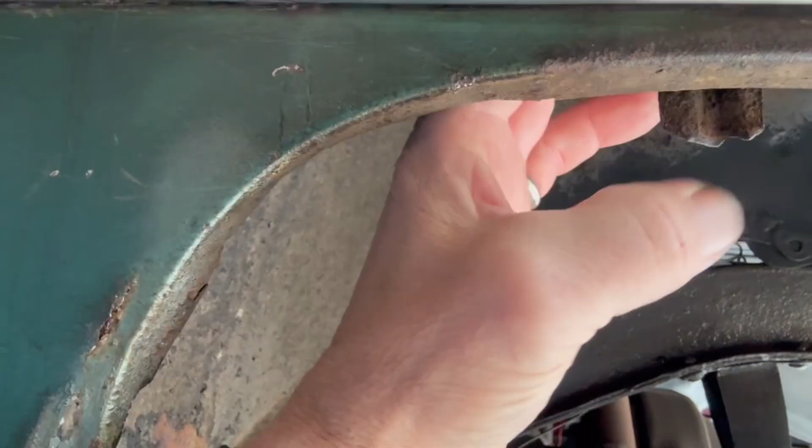Today we're working on fender skirt tabs, not the tabs on the skirt itself, but on models that came from the factory with fender skirts. These tabs are welded to the inner fender to help position the skirt and keep it from moving in towards the wheel. They're mostly present on the driver's side of the vehicle, but completely absent from the passenger side of the vehicle I'm rebuilding. So in this video, I'm going to measure and fabricate new tabs and install them. Stick around.

So here I am under the car trying to make up these tabs that keep the fender skirt from moving inward towards the wheel. Here's the perspective.

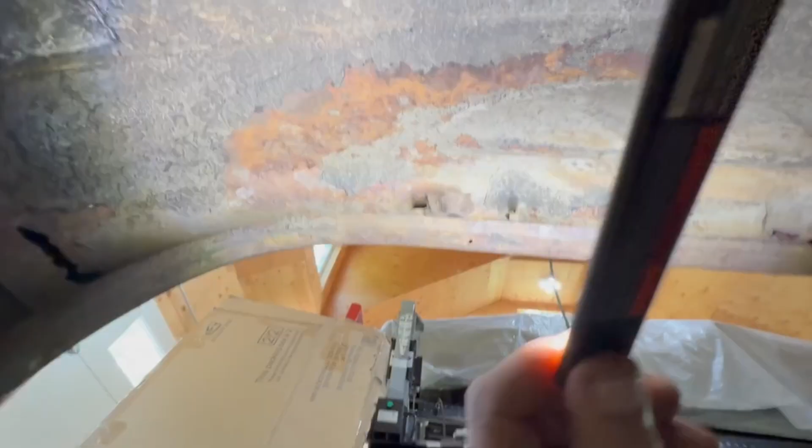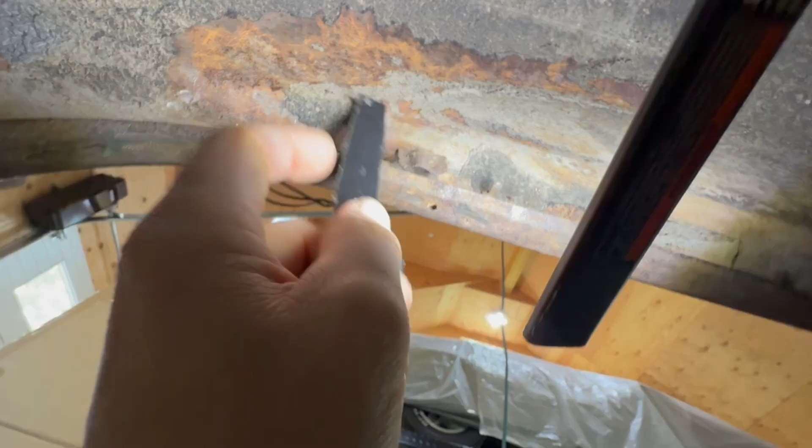I've taken some measurements, drawn some diagrams, and figured out these are 16 gauge. What I'm going to do is take this piece of metal and bend it to the rough shape, the up, over, and back down shape, so I can begin to try and form these out of some stock. Let me get on that.

This is the bottom part of the fender lip, and this is the innermost part with the angle that the skirt touches. So the skirt touches here and here. These clamps, once I make them, weld in like that. Maybe clamps isn't the right word, but tabs. In any case, I'll use this part of the template later, but right now I need to get the J shape properly.

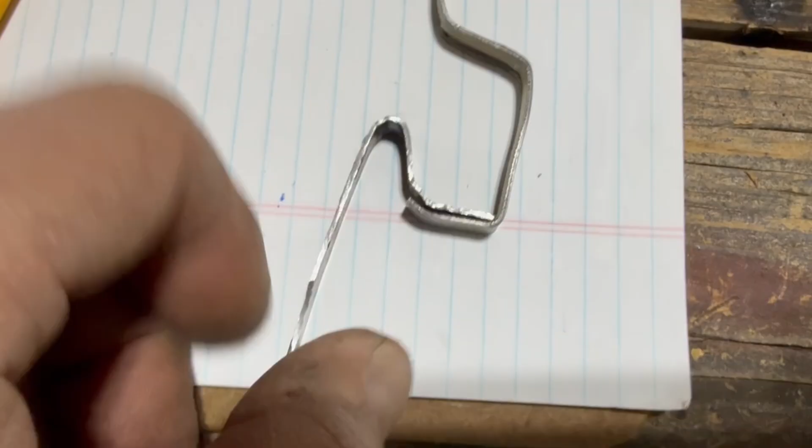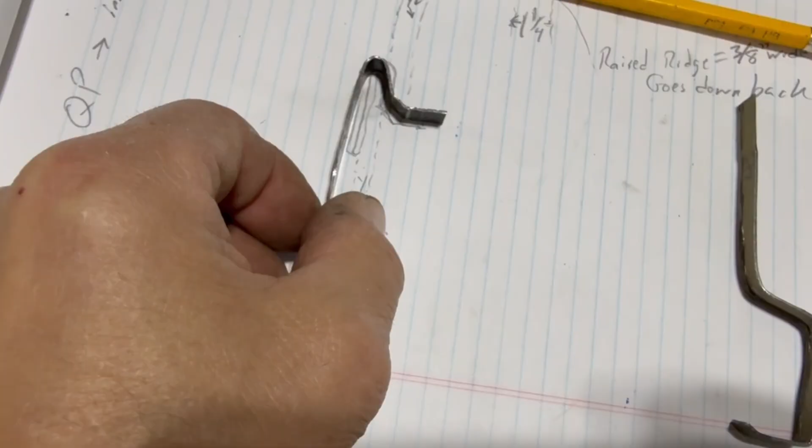So here's what I have so far. I've got this lower bend from this template, and under the car, I've got the approximate shape of the tab. Obviously this isn't to scale, but this is kind of what I'm after, and this piece is longer than it needs to be. Let me show you under the car how this shapes up, and then we'll see what we can do about forming this.

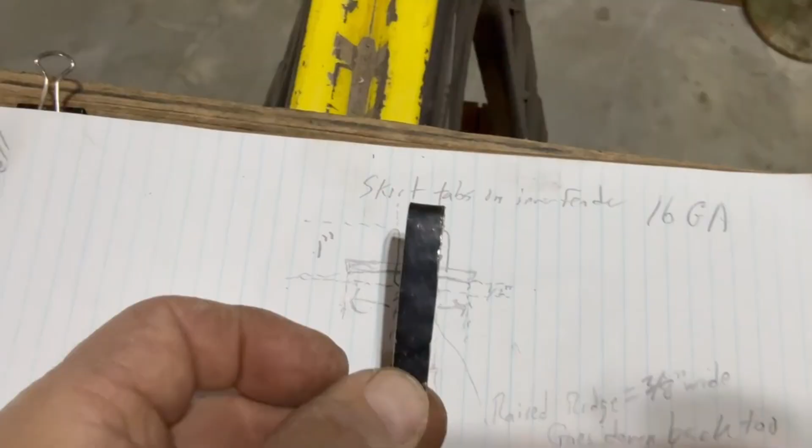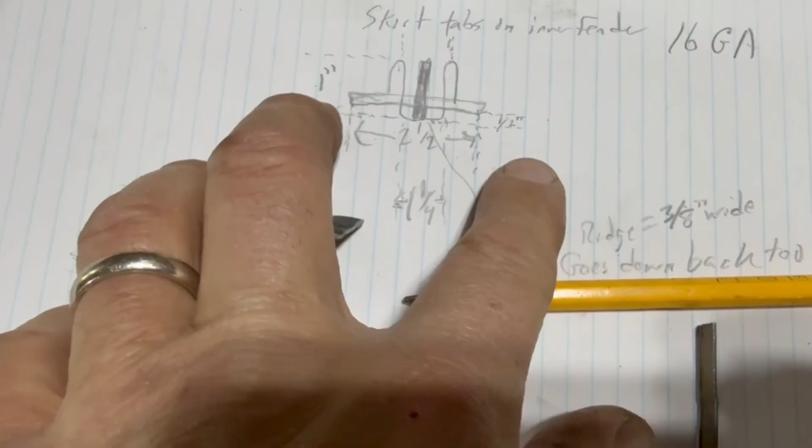According to this diagram, the tab is wider — a good 1.25 inches wide, while this is maybe 3/8 wide. And then there's a base which is 2.5 inches wide, which I haven't begun to worry about just yet. So let me show you under the car and we'll figure the next steps.

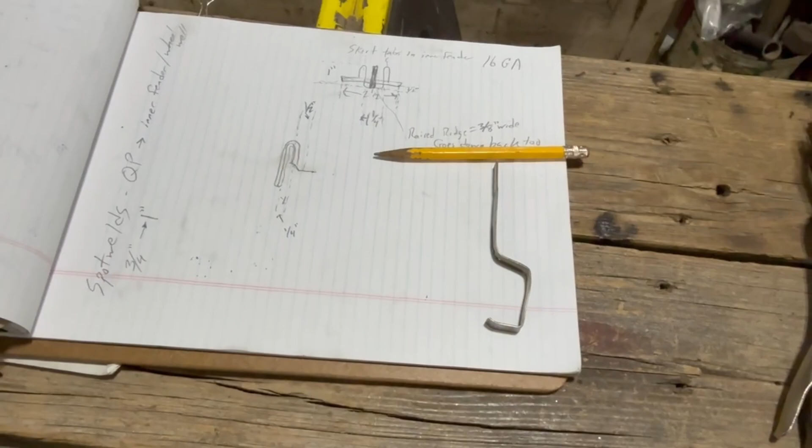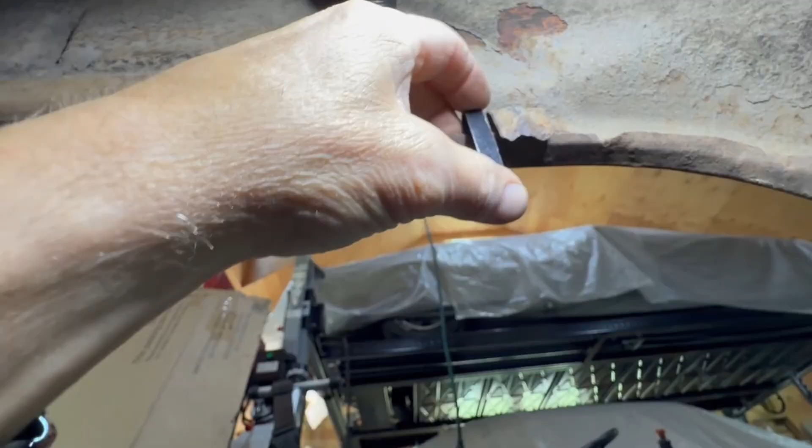So here we are under the car. Let's fit up this piece. The base to the original piece is there, and it's 16 gauge. I've set this so it's a little taller than that. In fact, if I pull it over, I can feel that this would almost ride on top of that. Looks like we've got the angle pretty close, we just don't have the length.

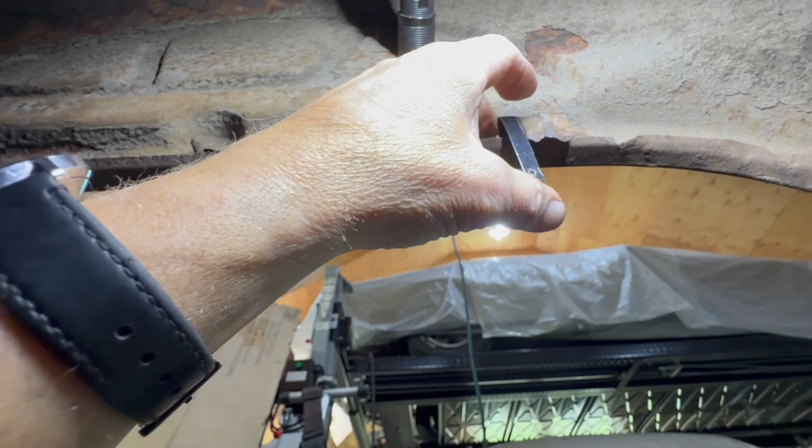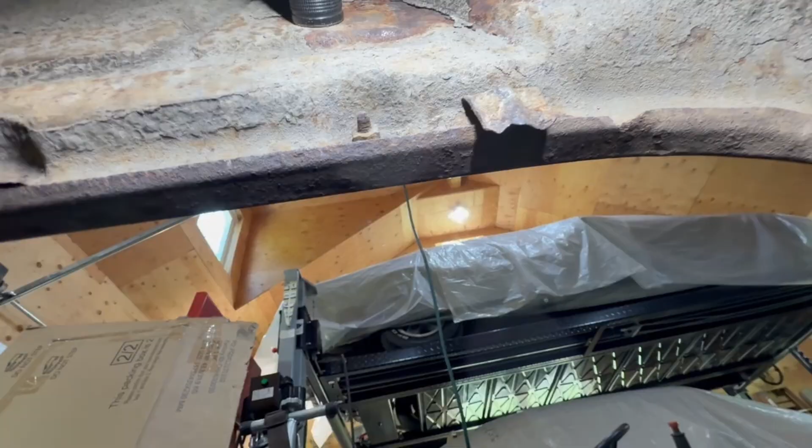So let me see what I can do about roughing that out in 16 gauge. I know 16 gauge is going to be tough to bend, but now that I have a pretty good template, maybe I can use the brake and that should help us out. Not quite sure what to do about the base — do I weld tabs, just make this tab and weld extensions on for the base, or do I bend the whole thing up and then cut it to get this center section? So I'm just not sure yet.

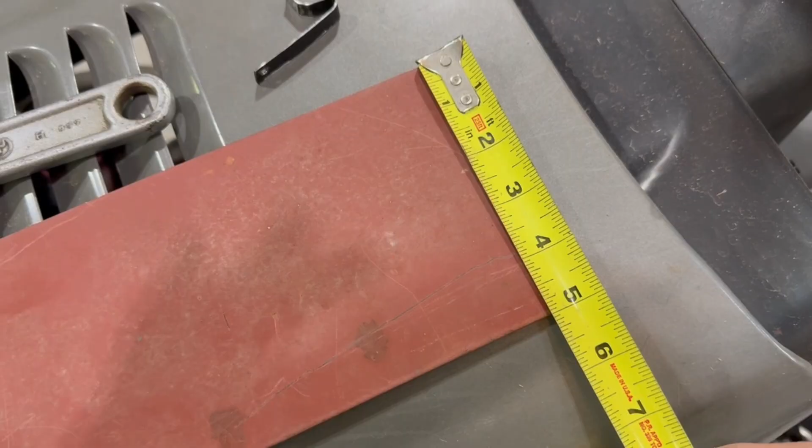According to the diagram, these things have a 2.5 inch base, and I need to make two of them. This piece of 16 gauge I have is 5 inches wide. So I'm going to try and do the lower bends on both of them and then cut this in half if I'm successful with the lower bends.

I've marked where I want the bends, so like that and like that. Frankly, I'm not sure if my brake can even handle 16 gauge, so this is a real crapshoot. I'm going to do this outer bend first.

So first thing I'll do is — yeah, actually it's bending it this way. I'll put that bend in, then pull it back and put the second bend in. Then of course this loop I'll have to figure out, but I'll be working with a much smaller piece at that point. In fact, maybe I'll gouge out the rough tab at that point.

So I guess this is proof of concept. I have enough metal that if I screw this up, I can try it over with a different method. Let's see how we make out.

Well, my brake is strong enough to bend 16 gauge, but not accurate enough to put that — I don't know what the correct term would be, maybe a compound bend. So I think this might be close enough though. Let me figure out how to hold this so I can show you what I mean. While I didn't get this fine double bend in there, I think that overall shape is compatible with the inside of the wheel well. Same on the other side also. So the piece I'm trying to make, which is this — oops.

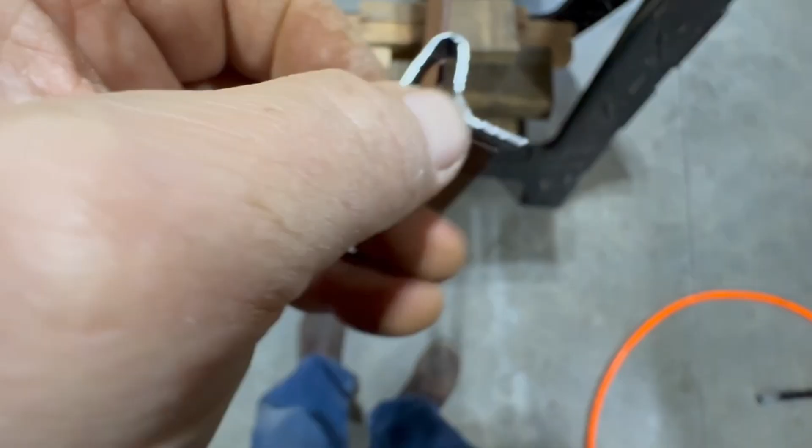So this part would mount into the wheel well, then go up and back down towards the fender skirt, towards the ground. Same basic shape, as long as it fits in the wheel well. I could trim this edge down a little bit so it sets nicely against that inner edge, the innermost lip of the wheel well, right here. Then the tab goes up and back down, roughly that shape.

So we might be able to pull that off. Let me see what I can do. Guess I need to figure out how much length I need, then cut this in half and try to whittle out the individual tabs. Still a prototype, proof of concept, but so far so good, I suppose.

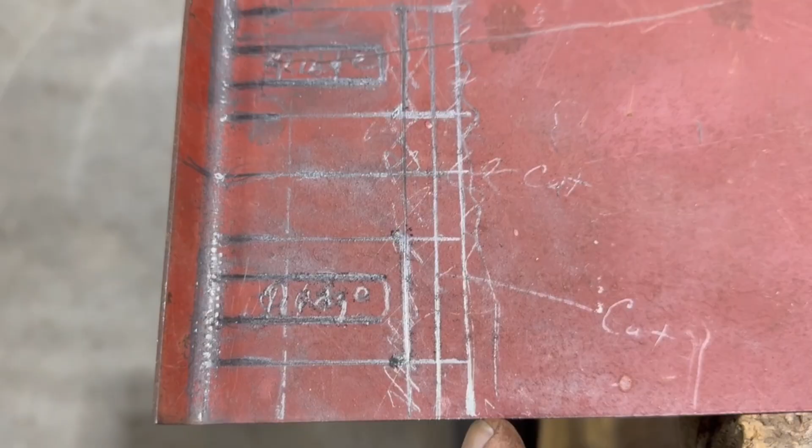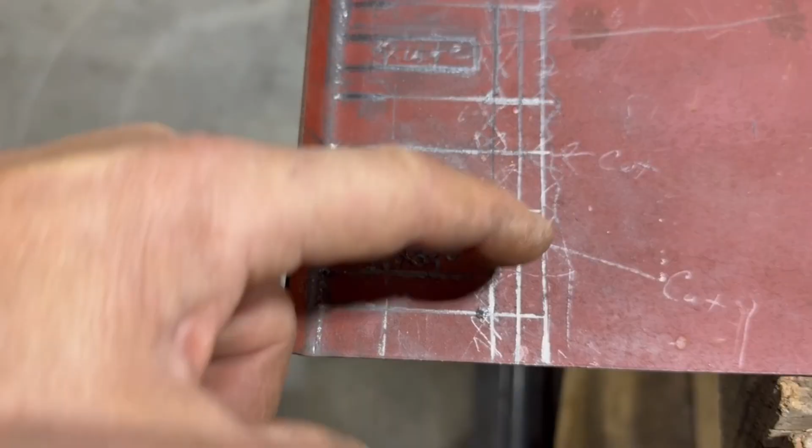Using the dimensions I captured earlier, here are the two tabs mocked up. I'm going to cut the piece off about here, where I think the actual length of the tab is closer to here. You can see where the bend would be, and then I have a ridge there, so I'll have to hammer that from the outside. The base of each tab will be this big, and you can see the basic shape of the tab, where I have to hammer the ridge, and where I need to bend it to put the J-bend in.

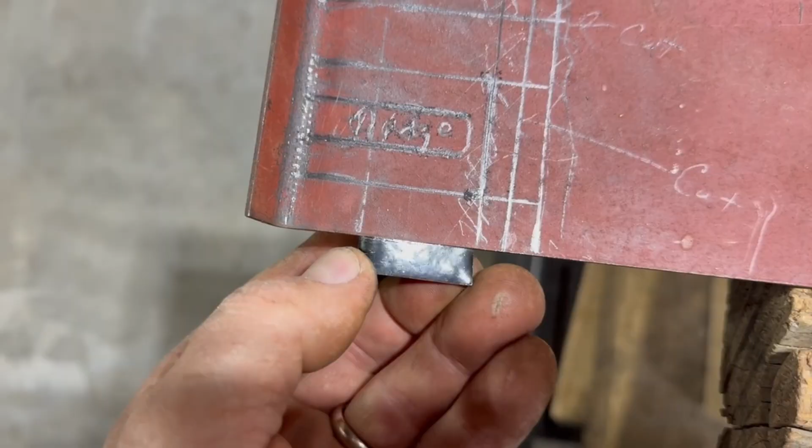Working against the template, this is about how it looks. There's the J-bend, this comes up here, and you can see that's roughly the edge of the tab. The ridge is going to be proud on this side. So anyway, that's the plan.

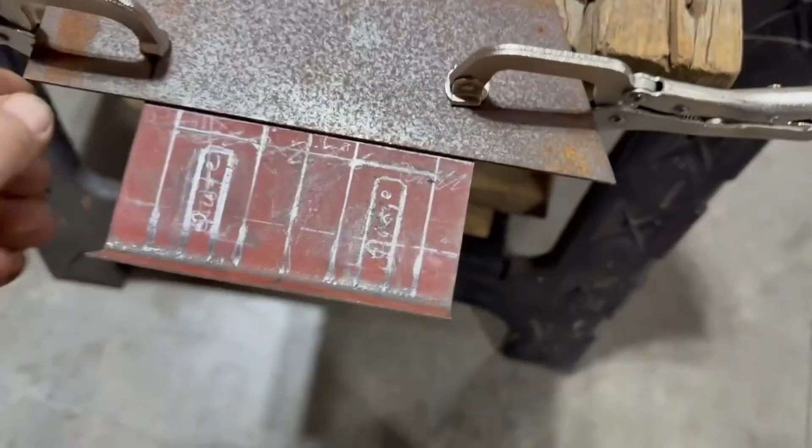Better start cutting and shaping. I've clamped a piece of heavy stock here to help guide the cutting wheel. I think this is probably about 10 gauge, feels thicker than 14, maybe it's 12 gauge. Anyway, that should help guide the cutting wheel, give me a cleaner, squarer cut there.

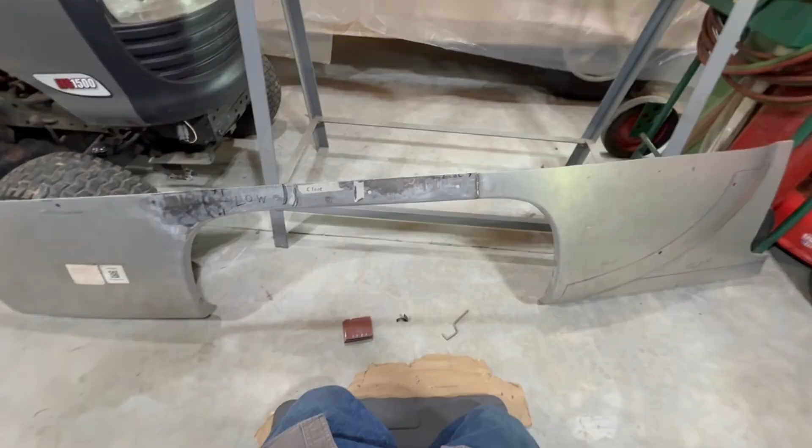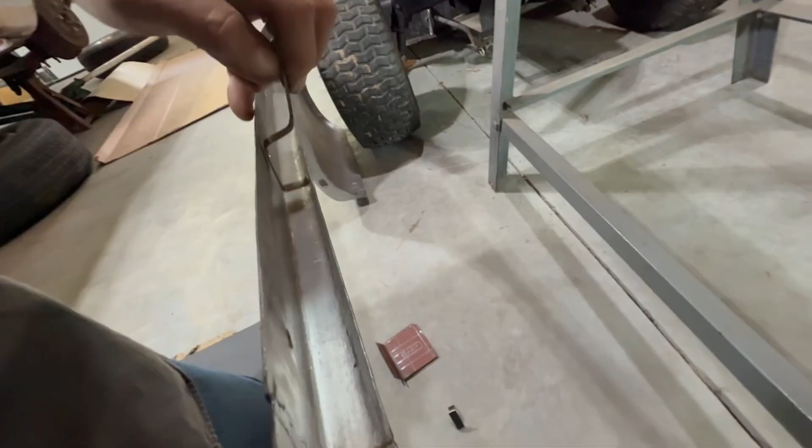So we're over here at the quarter panel to do a sanity check. Here is this piece, just showing the shape of the fender lip and the edge of the wheel well. And this is our mocked up tab, and our tabs fit in like this, and then hang down to support the fender skirt. So the mock-up is about right.

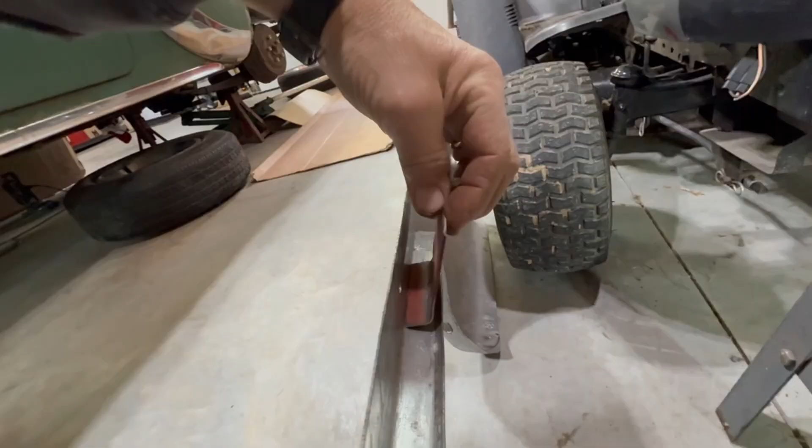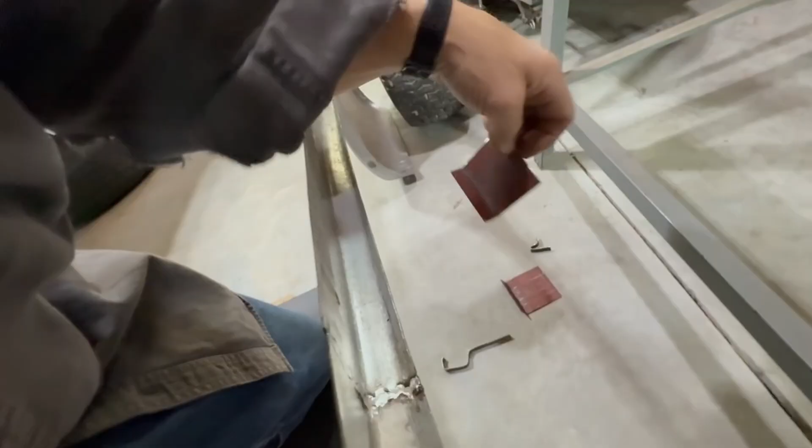Now here are our two respective tab blanks. You can see that one fits there okay, and this one fits up at this end okay. Let's check the other one. The other one fits here okay, and fits up this way okay. So far so good. We've got some more trimming and shaping to do, but I'd have to say we're on the right track.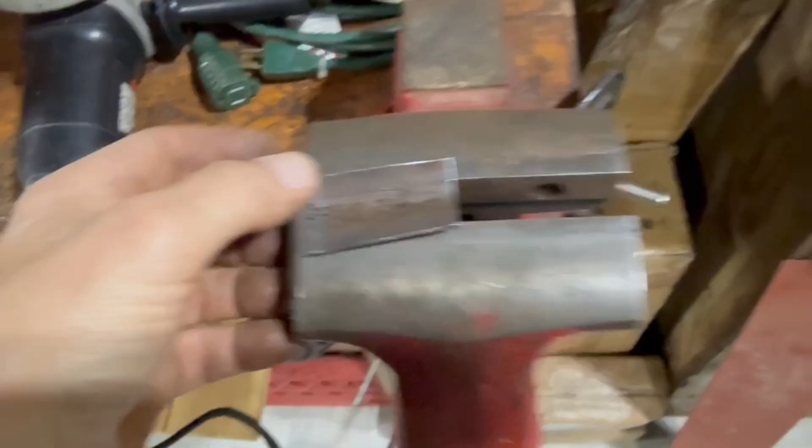So I have everything trimmed, ground, and filed, and I started to beat the divot in, the bevel, the ridge, in the open jaws of a vise. You can see it's mostly there. What I need to do though is put a little bit of a 90 or 45 right about here, to make it more of a defined ridge instead of a gentle curve. Anyway, we're getting close. Obviously the tab's a little longer than it needs to be, but I'm pretty happy with how that's turning out.

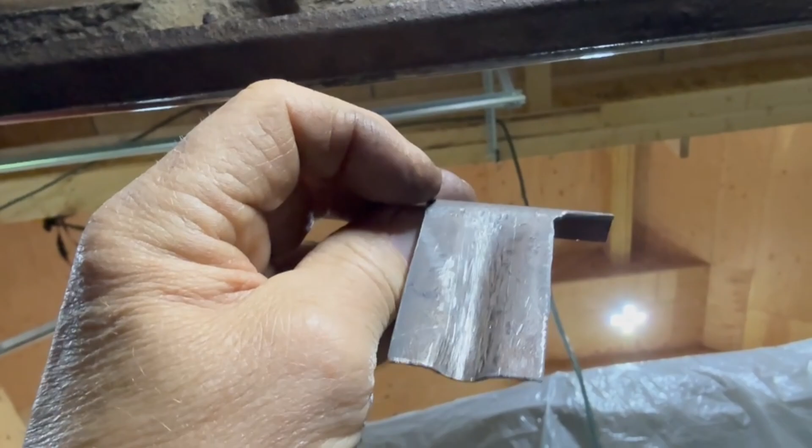I've straightened the edges of the ridge out a bit, which of course brought the ridge down a bit. I compared it to what's on the car, and the ridge needs to be a little deeper, so I'll narrow the jaws of the vise a little and try to poke that in deeper. That ridge is looking a lot better, pretty clean. Let's see, looks pretty close to the original.

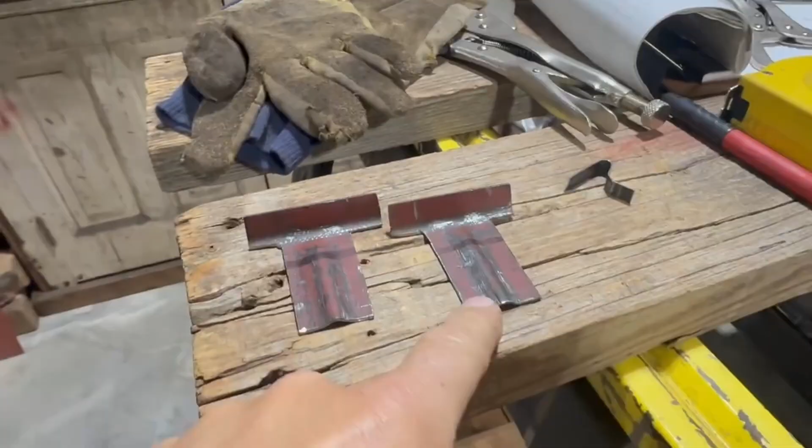So I formed the second one of these, this one here. Ironically, it was more work and didn't turn out as well as the first one. You can see more hammer marks on it and everything, but you can see that the two are compatible. They fit together reasonably tightly regardless of the angle, so I'd say they're equivalent.

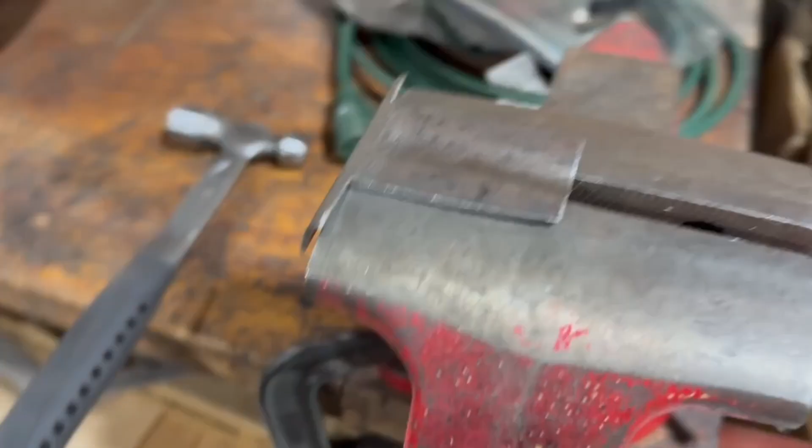So the next step is to decide where and how to make the J-bend. We'll figure that out shortly. As far as putting the ridges in here, I opened the jaws of a vise, set the flat piece in there, and beat on it repeatedly with this pointed body hammer.

And up in this corner here, I did hit it a little bit with the ball peen, and as you saw, the flanges weren't perfectly flat. So once I had the ridge, I put the piece in like that and hit in this direction to bring the flange edges a little flatter. And in cases where it was a little too proud, I put the piece in like that just to flatten the ridge out a little bit. Then I dropped it on the floor, and that completed the process.

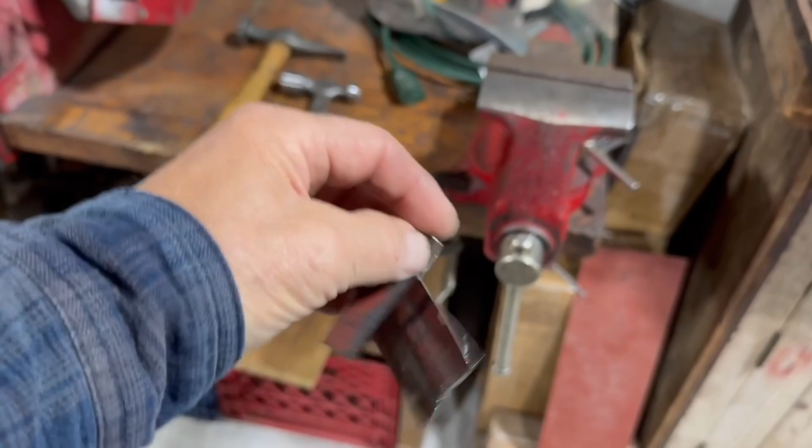There you have it. So I'm going to cheat a little bit on this. I'm going to use the torch to heat this up to bend, because with the ridge in there, it's really not going to want to cold bend nicely.

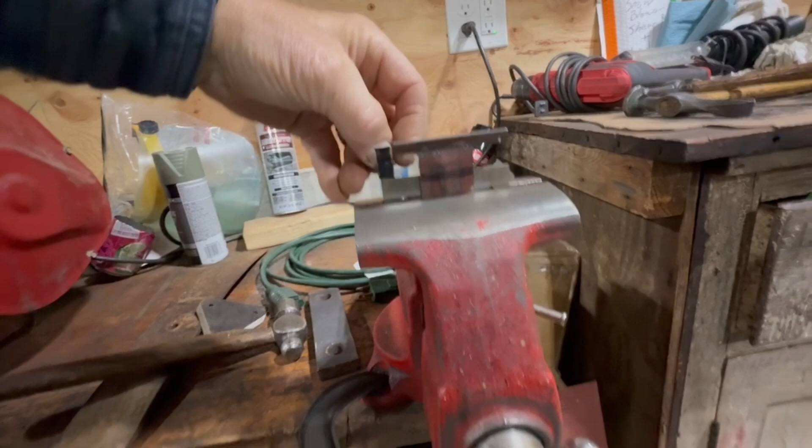So I have it placed in the vise using one of these, I guess, old lawnmower blades or attachments. I think it's off an old Jacobsen or something, to use as a fulcrum for the bend. I've aligned the bend carefully with the piece here, the template. So I'm confident that's where it needs to be.

Obviously the thickness of this material is a little thicker than this, so it's a guesstimate best case, but it's not exactly engine level tolerances, so a little bit of wiggle room is probably safe.

I have this piece of garage junk to beat against, and a couple of different sized hammers to hopefully drive it home. I would suggest that if you're going to try and cold bend this, maybe cut a slit in the ridge and then bend it over and then weld the slit up. Without the ridge there, I think this would bend pretty easily.

Of course, the originals have the ridge all the way through, even on the bend. So probably they used a multi-ton press to stamp these things out. So I'm just trying to synthesize that as best as I can. So let's light the torches and see what happens.

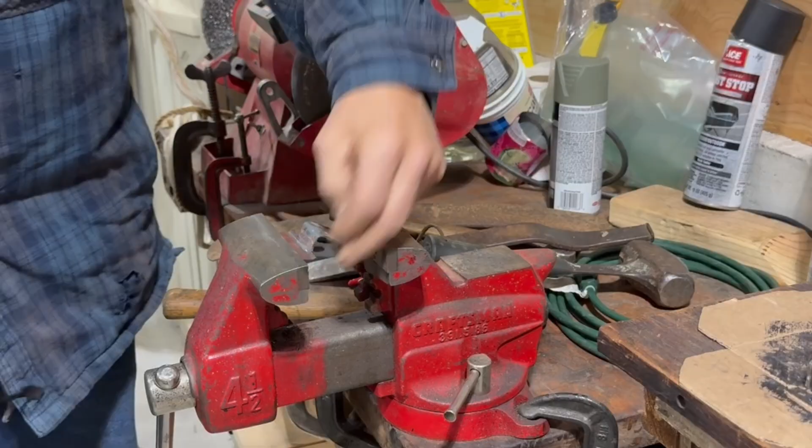So far, so good with the bend. Oh well, I think the gravity is a little stronger on that piece. But yeah, let's just try closing the vise, see how much closer we can get it. A little bit of torch again. A little sparkle wrench, little heat persuader. Yeah, that's a ticket.

Using a number 3 tip, trying to get a neutral flame here. Let's try and heat this evenly so it bends evenly.

Okay, that's the way we like it. Okay, here we go. Let's see how we do. Oh boy, look at that. Almost like a General Motors press.

Oops, we don't want to tease it. Let's get our template on there before it gets too much cooler. Have to bend it a little farther than we want it so it springs back. Boy, we're getting awful close right there. I'd say that's about right. So let's let that cool down.

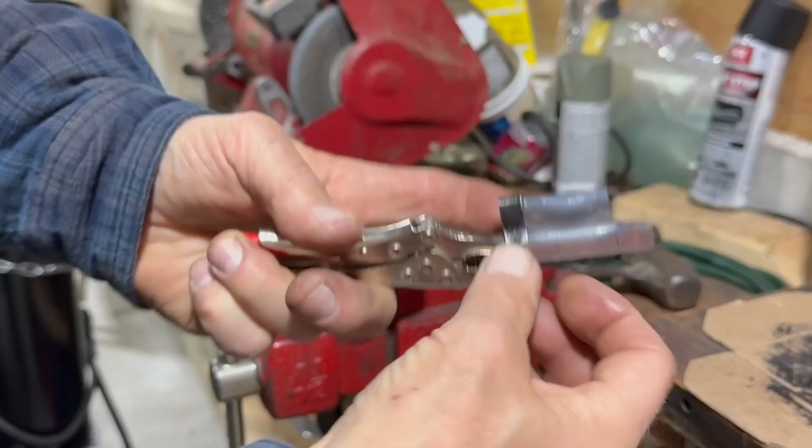Try not to burn my fingers here. That still is a little bit hot. So you can see, the template's a little higher than the ridge there. Of course, the thickness of the new tab accounts for that. Let's put it underneath, and pretty doggone close, so I think we're spot on.

And like I said, this isn't a bearing tolerance or end play or anything like that on a precision machine. This is just a freaking fender skirt tab.

So let me try and bend the other one up the same way. Hopefully I can have a matched pair, and then we can get them the next step further, trimming them down and the like. Probably what I'll do too is try them out on the new quarter panel. Maybe mock up the new quarter panel, hold these up against the wheel well with the fender skirt in place, and see how they are before I go any further.

Just one more view. If I hold these two pretty much in the same plane, you can see that they're very close. And let's try that on the other aspect. Oops. Yeah, look at that. Pretty doggone close.

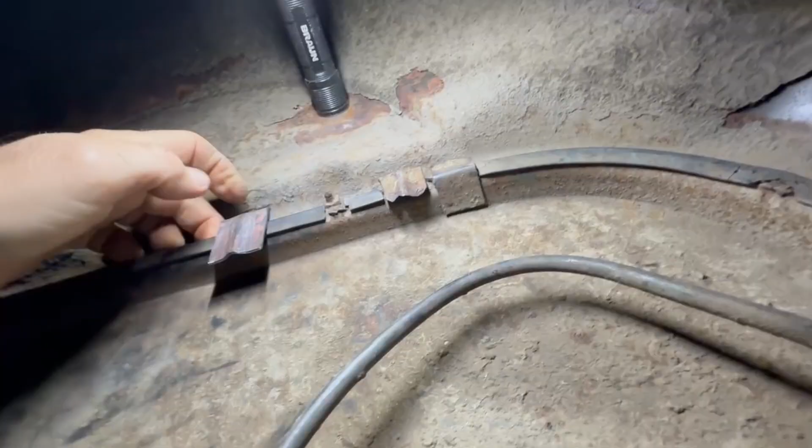So I'm back up under the driver's side, got the fender skirt in place. Here's the original tab, here's the one I just bent. Let's compare. I'm out here where the inner lip is clear, because the base of this one runs all the way out to here.

So yeah, the tab touches the rubber on the fender skirt. I think it could be bent in a little more possibly, but it's pretty doggone close. I think it would serve the purpose even if I don't adjust it further. But let me get it mocked up on the passenger side, which is where it's going to live.

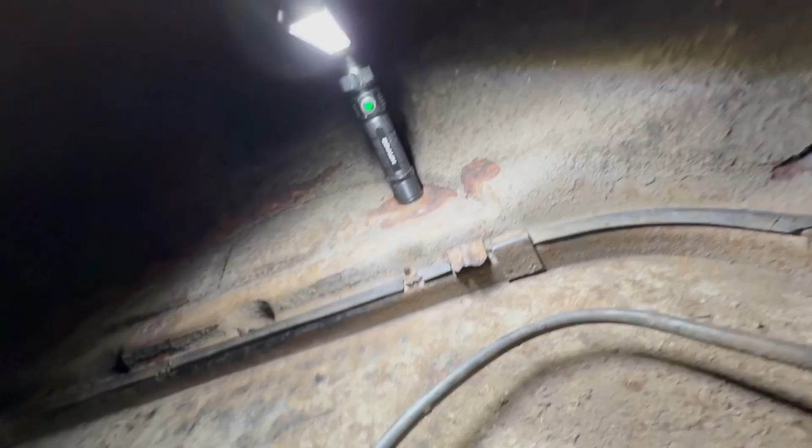Just for comparison's sake, let's put our pattern up there. Actually, our pattern looks like that could bend in a little further. What I did do is I cold bent this on the vise just a little bit further before I put it up under here, just to tighten that bend up a little bit. So it does bend cold, squeezing it this way in the vise.

Don't know if I want to squeeze it further. Certainly could before I install it, or could probably beat on it and move it a little bit once it's installed. But in any case, let's mock it up on the proper side and see.

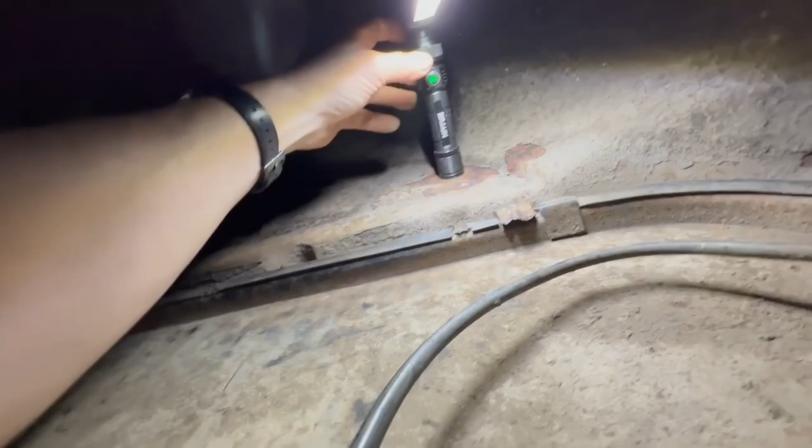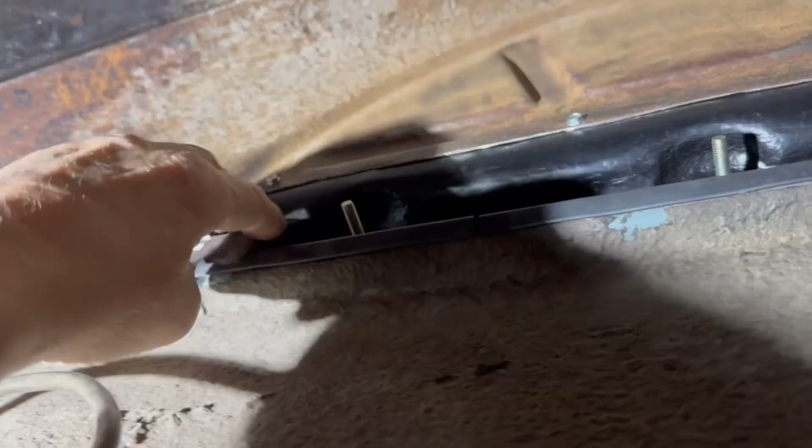So when I first put this up there, the gap was just too big. I've gotten it a little bit tighter by bending this angle slightly, but it's still too far away, too far out from the fender skirt.

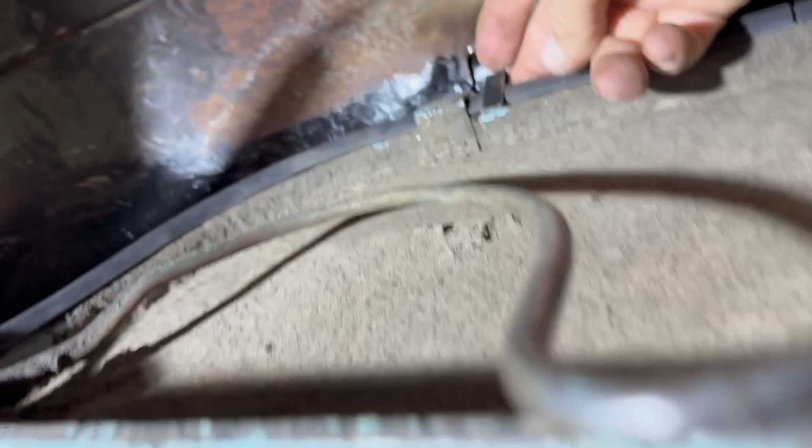So I've bent the template accordingly. Sorry about the shadow there, let's try it this way. The template piece is fitting pretty well, front and back. So I use the angles on the template to change the angles on the piece before I form the second piece. Let me get on that.

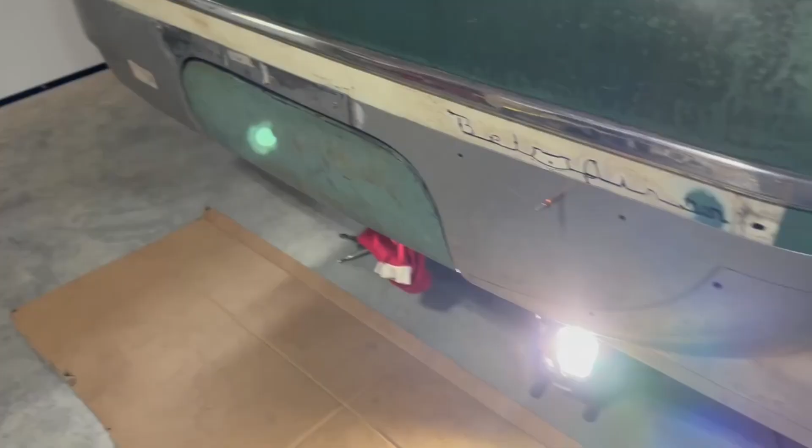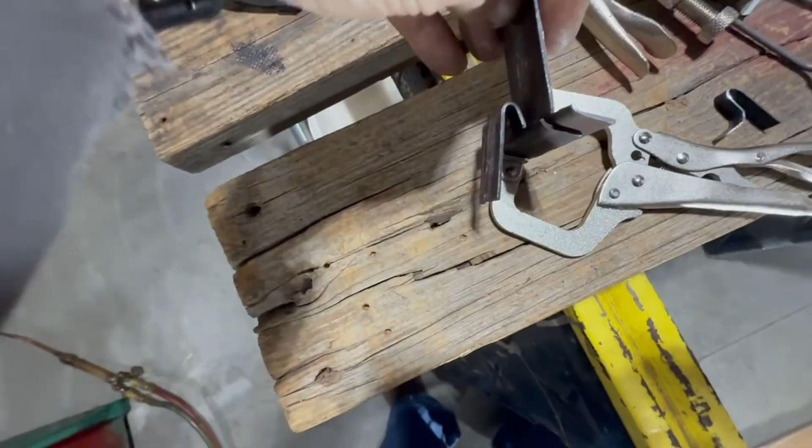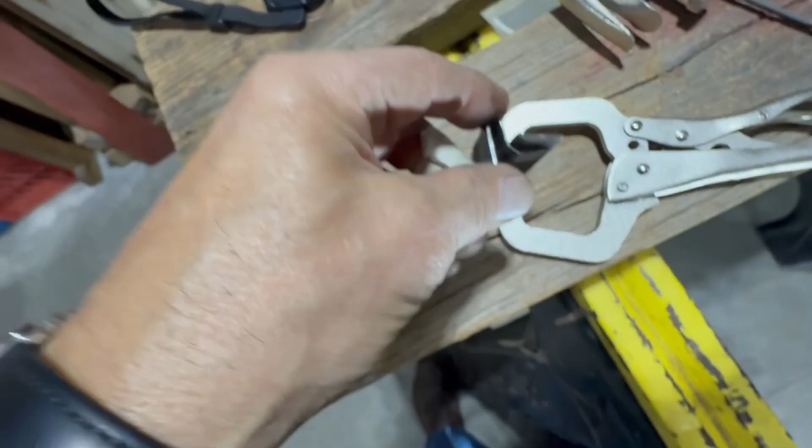This is on the passenger side of the vehicle, which is where these tabs are going to end up. I've changed this angle here a little bit just to start. You can see how it differs from the other piece a little bit. And the template, which should be pretty close to matching up, has a completely different tack at the beginning.

So I need to make this first bend here, the one I did on the brake, a bit more vertical. Let me try and cold bend that on the vise. There's no ridge there, so I should be able to pry and beat and change that shape a little bit right on the vise. Well, as luck would have it, the front one, while it's dialed in, doesn't fit the back.

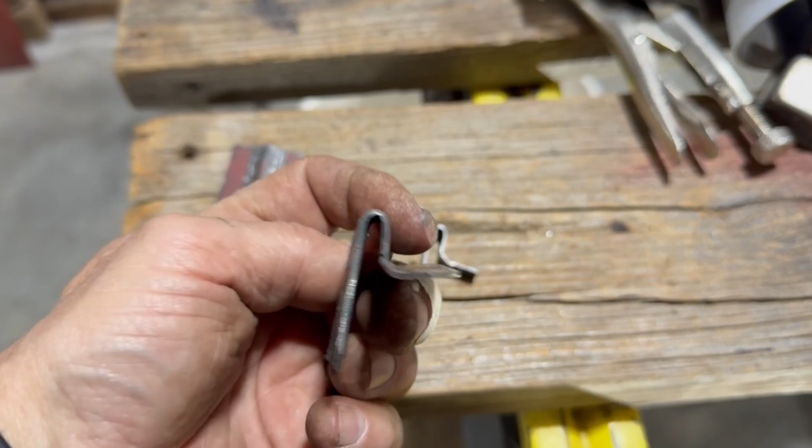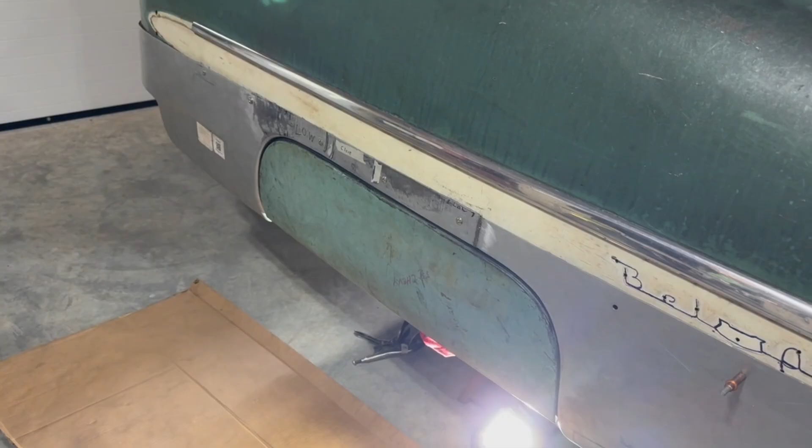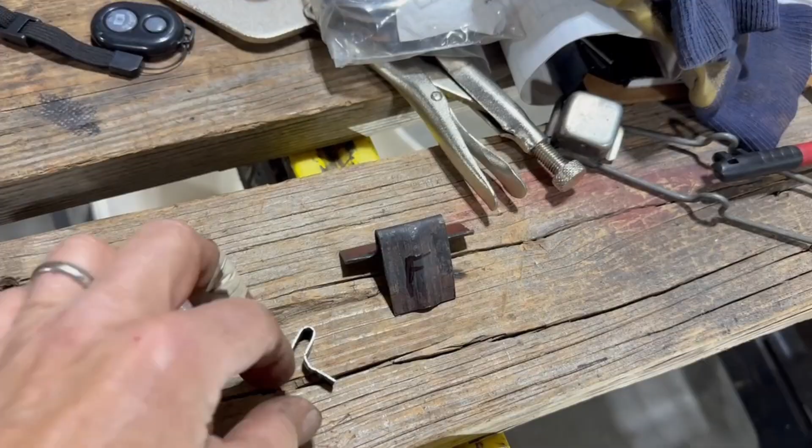The back has a different curve. So I've modified the template to cover the back, the rear tab position on the new quarter panel. What I'm going to do is address this bend here to get it to more closely match the template before I put the J curve in it.

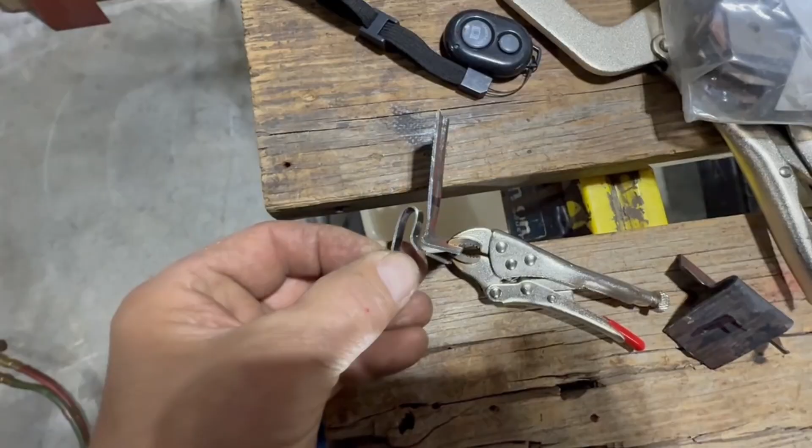You can see it starts out a little too gentle of an angle, needs to start out a little steeper. So we'll correct that on the vise, and then figure out where to put the J bend in. Always something, isn't it? So we've done a gentle bend in the vise, and looks like that first angle is a little closer to where it needs to be.

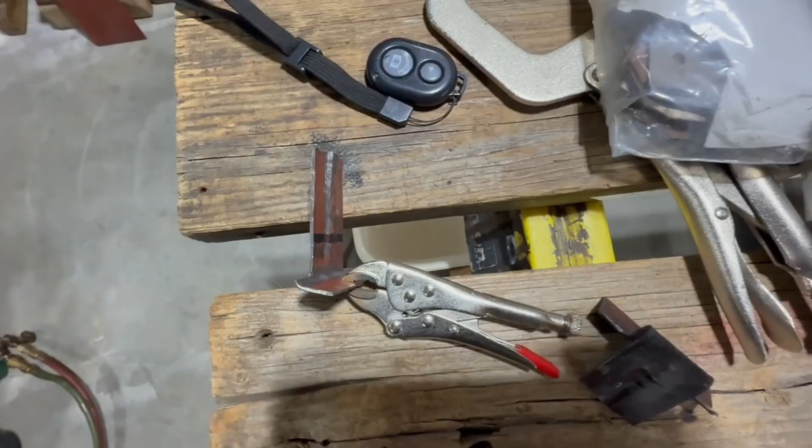Looks like the mark for the J bend is about right. So we'll use that and repeat the process with the torch to get the initial J bend in there. So we've got the first bend consistent with the template.

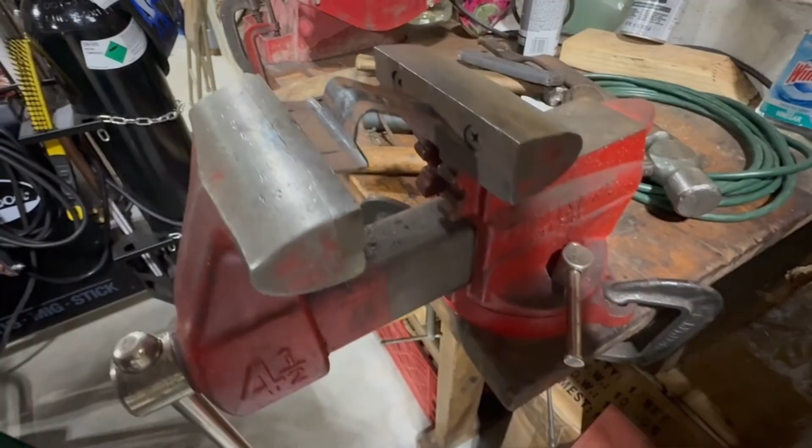So I've got it wedged in the vise this way. I'm going to put some more heat into it and bend it most of the rest of the way with the strength of the vise. So let's get the torch going again, get this cherry red, and bend that sucker down.

It's just cooling down now, and you can see that it's pretty close to the shape of the template. So once that's cold enough to touch, we'll try it on under the car.

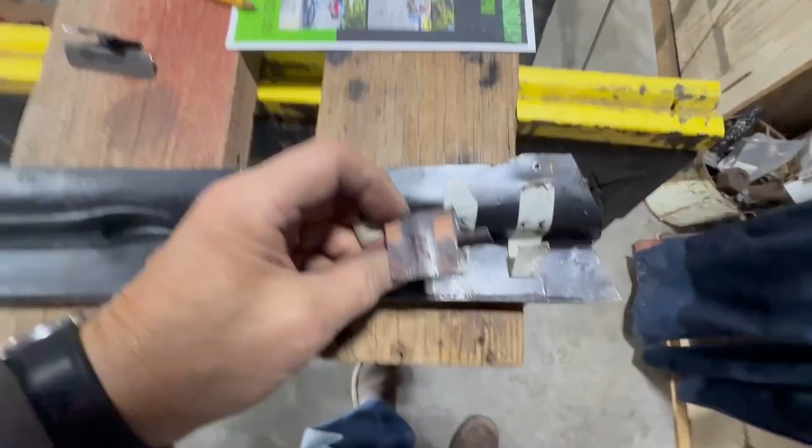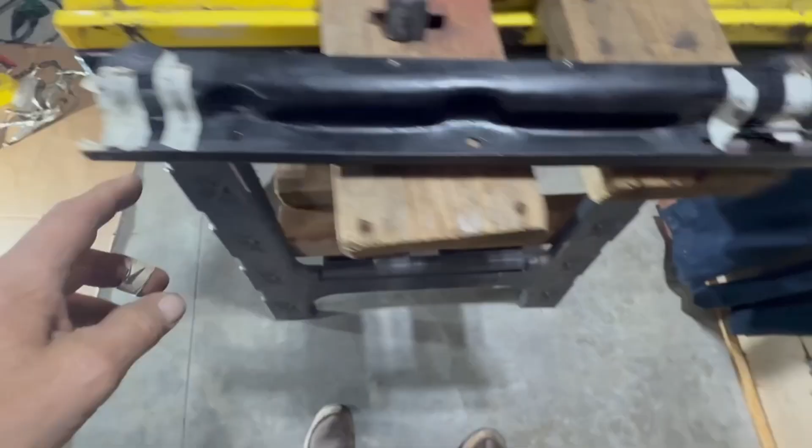So I've marked where the tabs go on the inner fender well. I'm gonna just tack them in front and back, and put a little tack along the edge here, just in case. Ultimately I'll plug weld them, but just want to triple check the location, and then of course I plug weld them, that could affect how the edge of the wheel well matches up to the quarter panel.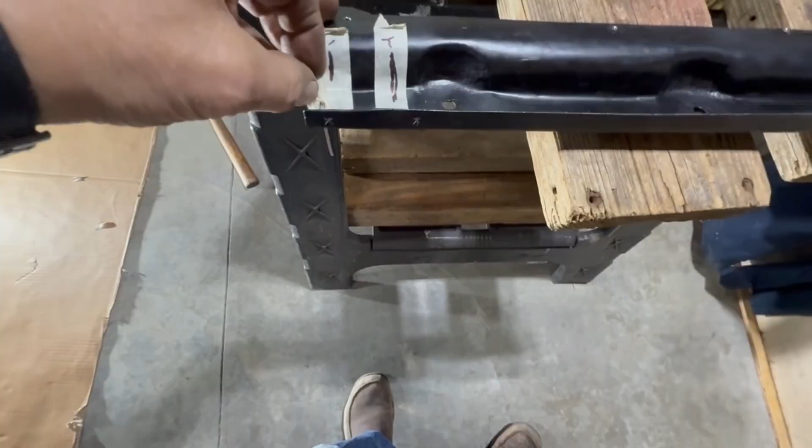So what I'll do is drill the plug weld holes in the quarter panel, make sure the fender well lip is close enough that I can weld nicely. Once everything's lined up good, then I'll follow up with the plug welds here, so I don't commit, because plug welds are tough to drill out.

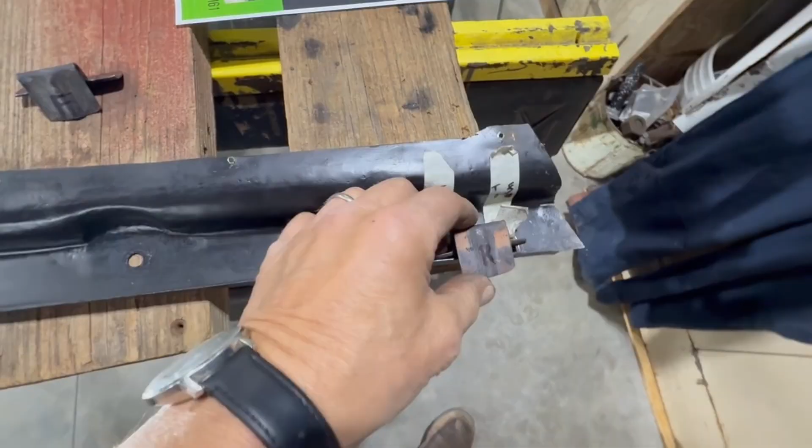I also cut these to length, so they might still be a little long. I may grind them a teeny bit shorter on the car, but this is pretty close to the desired length. So let's get them tacked in, get this back up on the car, and see how the skirt fits.

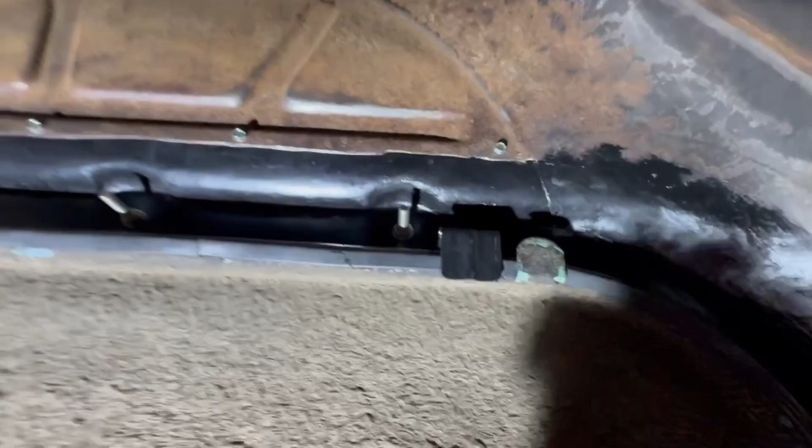So here are the two tabs fully installed, plug welded. I'm about ready to weld this center section in now. Just the final fit up, passenger side of the car, of course, and everybody's happy. Looks like a win.